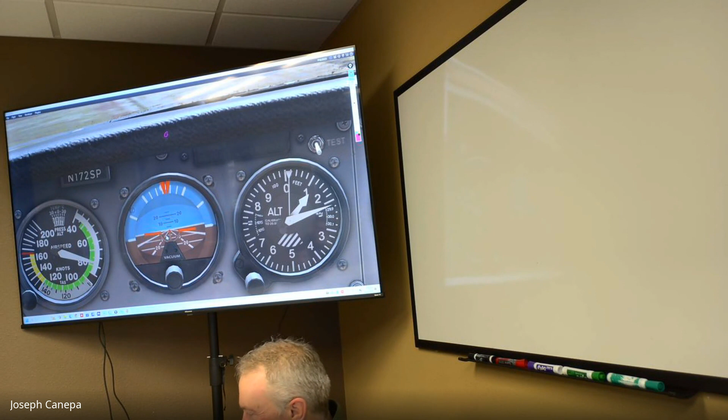Yes, it's actually pretty close to level right now, but you can see that little dot right there, it's actually just in the brown area. So that means if I look outside, we should be pointing down slightly. Let's zoom out here. Yeah, we're in a slight descent right there. You can see how you could just use the flight instruments to figure out what the aircraft is doing, how fast it's going, the altitude it's at. Here we can see we're in a slight descent right here in direction. So all of that stuff can be used.

Now, when you fly instruments, once you get your instrument rating, you'll be looking at these instruments all the time because you're going to have a hood on. They will not let you look outside when you're doing your instrument training.

Sometimes they put little curtains, or a colored film, over the windows and have you wear glasses so you can't see anything outside. It's just black.

But for instrument training, you need that because if you're flying in the clouds, you won't have reference to the outside world. It's amazing, you think it'll be easy, but after about half an hour your body starts telling you something different. It feels like you're in a turn, and that causes problems. Anyway, we'll talk about that.

So let's now discuss what these different instruments are made of. Let's go back here. All right, so this right here, we've seen it before. Let's go back to our image, and I'll show you this on the outside.

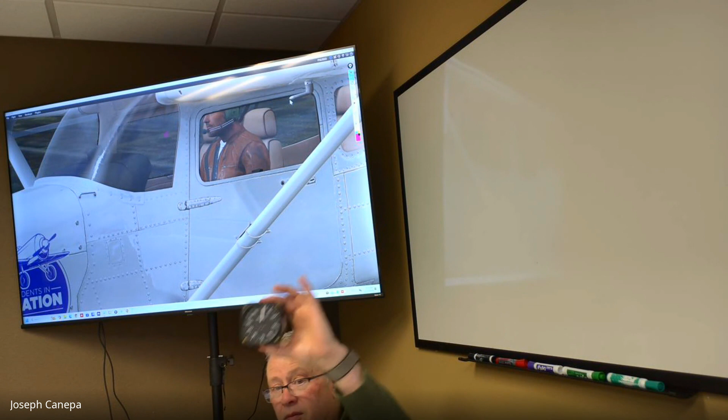Essentially all it's doing is measuring the amount of air hitting the aircraft, and by doing that you can determine your airspeed. This is a typical airspeed indicator - it's just got a needle that tells you how fast the aircraft is going. Again, it's not based on your ground speed, it's based on your airspeed.

Obviously if I were to blow into one of these holes, I could get that needle to move. The other thing you could do is take a tube and run really fast, or hold it outside your car window. That needle is going to start moving based on the speed you're traveling at.

So if a plane is just sitting on the ground with a strong 40-knot wind, that's the same as if you were flying at 1,000 feet traveling at 40 knots. It's the exact same thing. Again, it's not measuring ground speed, it measures the speed through the air - that impact pressure that's occurring there. Does that make sense?

So again, this is just a hollow tube that goes through there, and this is plumbed into the airspeed indicator. The airspeed indicator is the only instrument in the aircraft that uses the pitot tube. The vertical speed does not, and the altimeter does not use the pitot tube. There's a couple other elements in here.

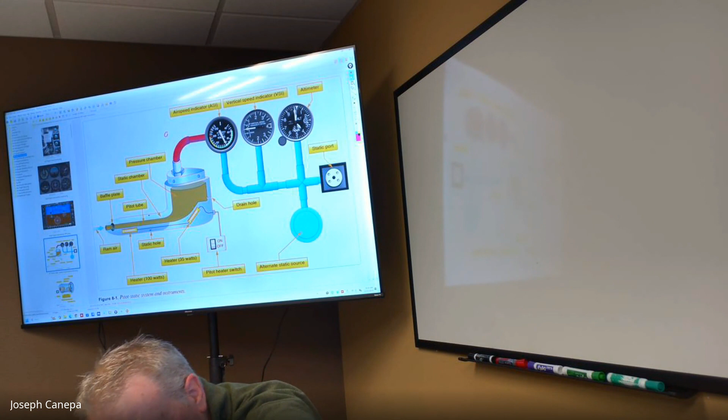Okay, so the next one is the vertical speed indicator. Well, actually, before we talk about vertical speed, let's talk about the altimeter, because that's a little easier. So an altimeter - okay, so this is an altimeter right here. Let me just...

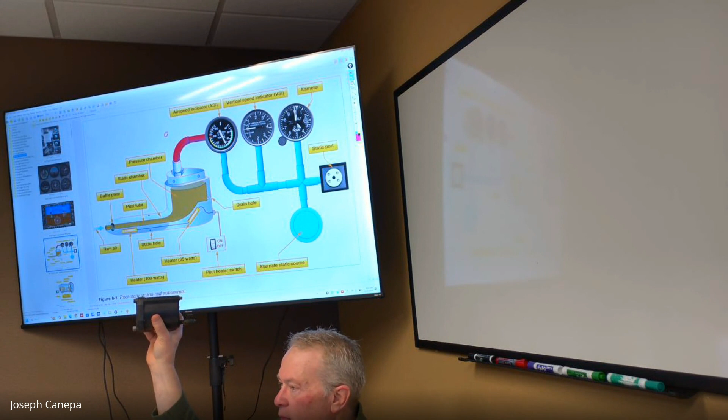So can anybody tell me what the altitude is that this is showing? 1,000 feet. Yep. And that's because the small dial there, the small needle is pointing at 1. The small needle represents thousands. The long needle shows 100 increments.

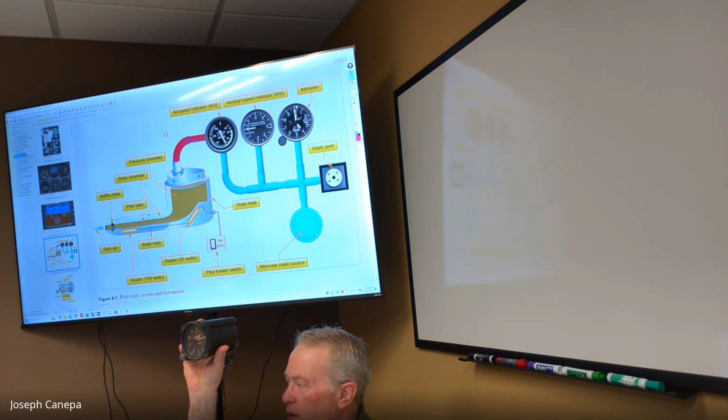So 1,200 feet would look something like this. Notice that the small needle is still showing close to 1,000, but that hundreds needle is showing 2. That's how we see that.

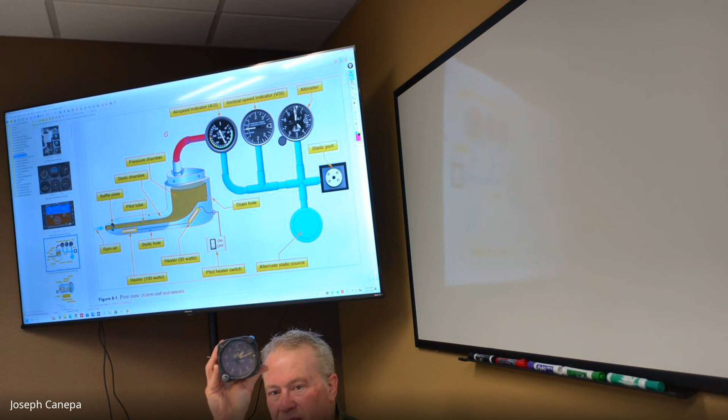And then you can't really see, there's a very small, thin needle pointing up close to 0. I don't know if you can see it at all. That's showing 10,000 feet increments, and that's barely reading on here. It's just still pointing at close to 0. So that's how we read the altimeter.

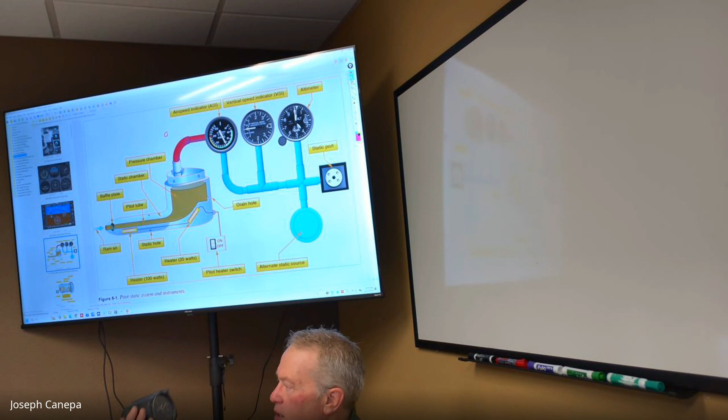Okay, you fill a balloon up. So if we take a balloon, fill it up on the ground, and raise it to 1,000 feet, is it going to contract or expand? It's going to expand. Exactly. That's what's happening here. These aneroid wafers are just a balloon, essentially.

We have to understand, first off, that as we climb up in the atmosphere—right now we're at ground level here, which is roughly about 920 feet at this building. If we were to climb up 1,000 feet, these wafers would expand, but the air up there has less pressure at 1,000 feet. And the same with 10,000 feet, there's a lot less pressure. So this is going to affect how this operates. That's how an altimeter works.

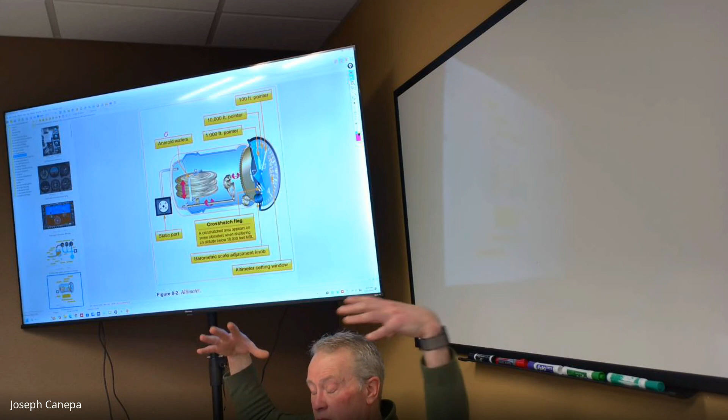I would probably break it on the vertical speed indicator, because it's a pretty cheap instrument. The altimeter is much more expensive. But if you crack that glass, all of that air around in the cockpit itself is static. It's ambient pressure, same as outside, maybe a little bit lower, but not much.

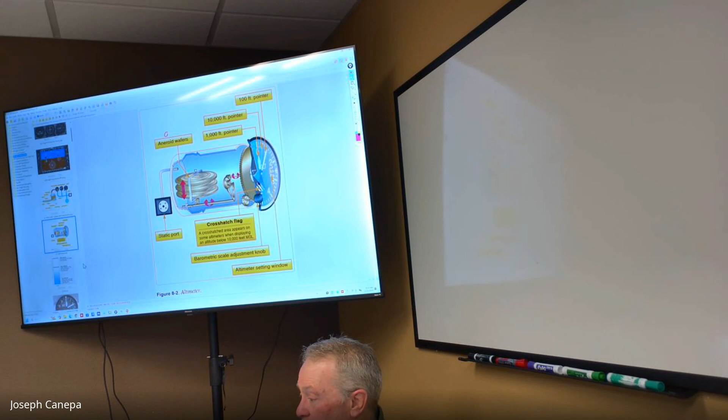It will still at least show you what your altitude is. So the vertical speed indicator, let's see if we can find one here. Okay, let's just go here. I think again a separate diagram. Let me just see if I can show that here. Down here, oh, here we go. Yeah, okay, so this is a diagram of a vertical speed indicator.

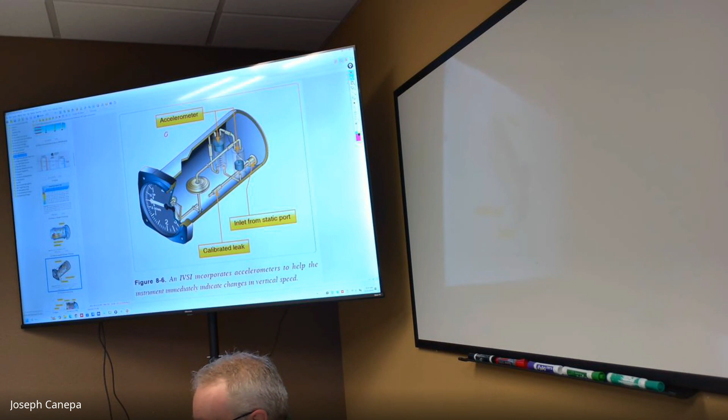It's very similar to the altimeter in the sense that it's got an aneroid wafer, but there is a difference. The big difference here is there is a calibrated leak, and they don't do a good job of showing it here. Maybe this is a little bit better.

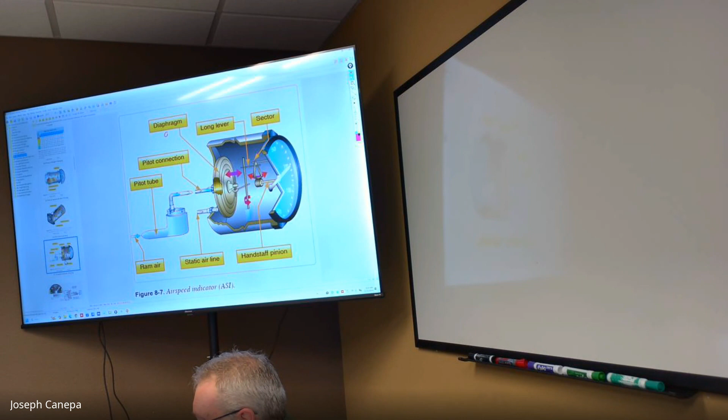The simplest way to explain that: you've got a balloon, and has anybody ever done this where you take a balloon, put a piece of tape on it, then push a pin through that tape? What happens is the balloon leaks very slowly, it doesn't just pop. Try it sometime: blow up a balloon, tape part of it, then push a pin through. The balloon won't pop, it will leak air. That's essentially what they've done here, they're leaking air out of the system.

So if I take, let's say we do this with the balloon, does that make sense what I'm explaining with the balloon? It doesn't pop if you just put tape on it. You've got a nice tight seal on it. It's a very, it's a pinhole leak.

But if we blow that balloon up on the ground and push a little pin through it, it's leaking air. As you climb, if that balloon was sealed it would just keep expanding, right? But this one's got a calibrated leak, so it's going to keep getting smaller and smaller, it's just going to leak. Eventually, if we stay at a certain altitude, the balloon is going to collapse all the way down to nothing because it's got that leak in it.

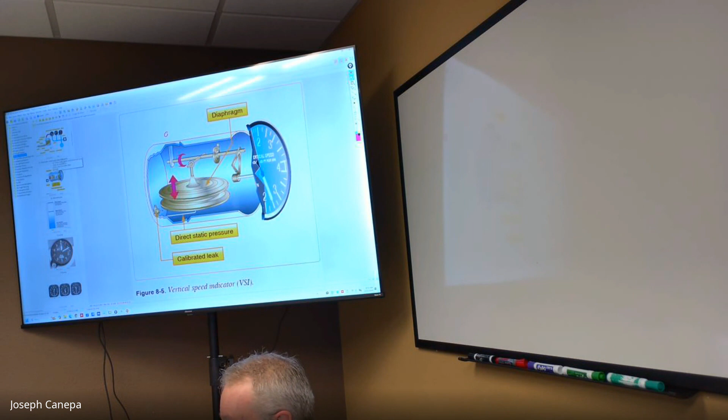But in any case, it is on the aircraft, we're just not seeing it here. I'm not sure why, but it would probably be somewhere in this area right here. They're very small—again, you're not gonna... it's very hard to notice. Let's go here. Let's see. We've got photos of it here. All right, um...

And directional gyro. So now let's—we've looked at the airspeed indicator, we know how that works. The altimeter, we know how that works. Vertical speed indicator, we know how that works. Now there's the other instruments that we have. We've got the artificial horizon, we've got a directional gyro, we've got the turn coordinator. You kind of explained what they do, but how do they work?

So to do that, what I'm going to do—these are all gyroscopic instruments. These three instruments have gyroscopes in them. So we've talked about this before with gyroscopes, how they work. I'm going to try to get this thing spinning so you can actually see how it works. Do you remember that we talked about gyroscopes a while back? We talked about rigidity in space. And because of the way gyroscopes work, they resist change.

They don't—when you try to move them, they resist. They want to stay in the same position or whatever. And we use that in aircraft, like here for the attitude indicator. That's got a spinning gyro. It actually would look very similar to this. So, I've got an attitude indicator here. Let's get this thing up to speed here.

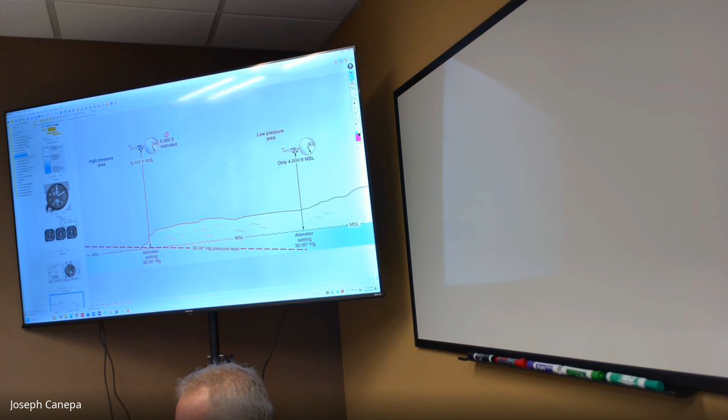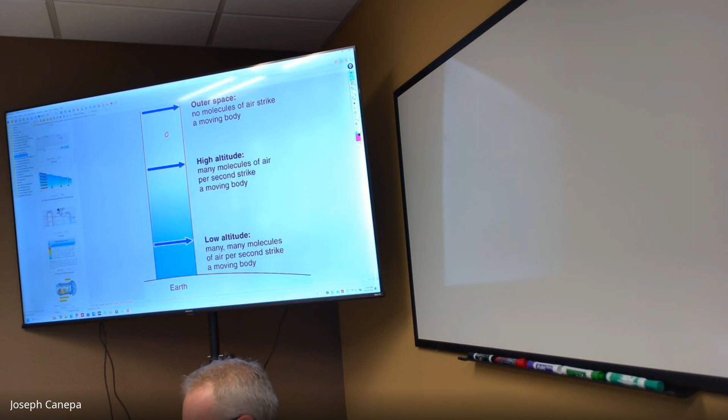Now, some of the things that can happen, as we've talked about before, are changes in pressure in the atmosphere. So here we've got an area - let's say this is Reedsburg right here - with relatively high pressure, and then lower pressure at Baraboo. Notice both of these planes right here, let's see that name. Yeah, they're both... we'll use this right here.

All right, so at Reedsburg, maybe you've got relatively high pressure - let's say like this. Let me put it in a better diagram.

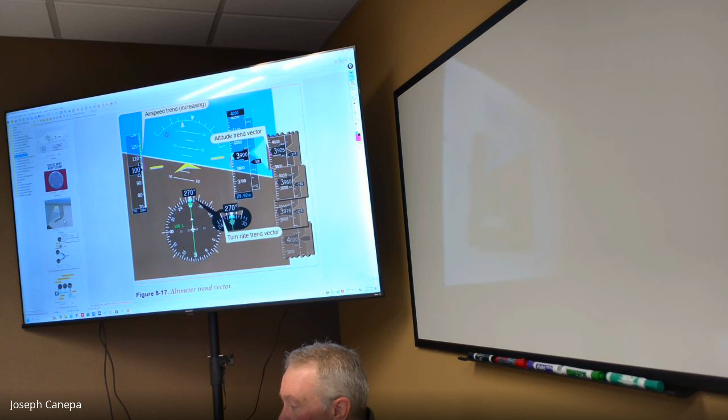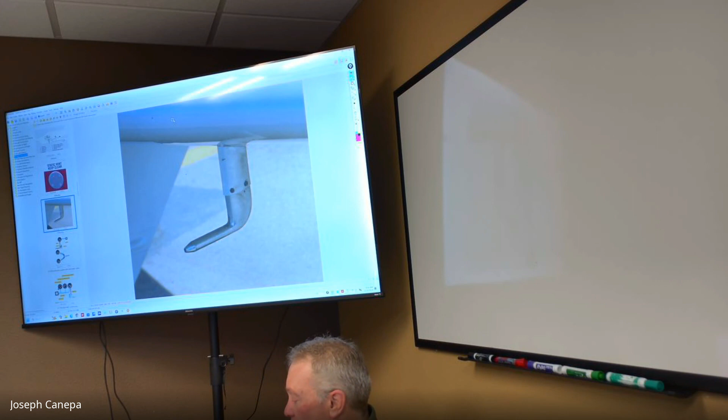Donnie asks why the pitot tube has to be like 3 to 6 inches away from the surface. It's a good question. What happens is - right here, this is the leading edge of the aircraft right there.

So this right here is the leading edge, and the air comes in from this direction and flows over the aircraft like this. But the problem is when air is flowing like this, it hits this and creates turbulence in this area where the pitot tube extends down right here. So what they're trying to do is get that out of the turbulent area.

So you get a more accurate reading of what the ram air is. In supersonic aircraft, it's even more critical. I don't know if you guys have seen pictures of some supersonic aircraft with their pitot tubes stuck way out on a pole or on the nose, and that's because there's a lot of turbulence around the aircraft.

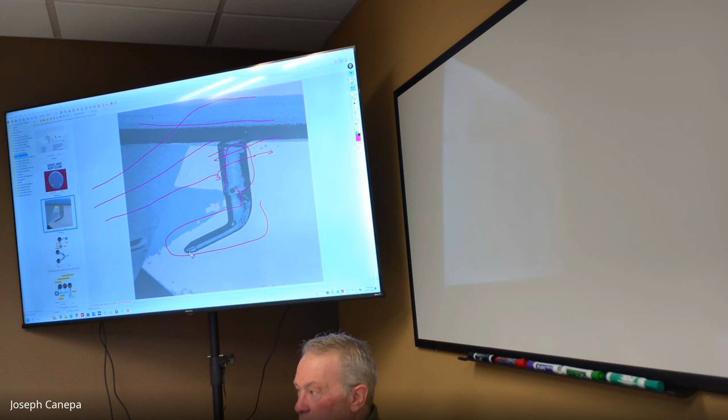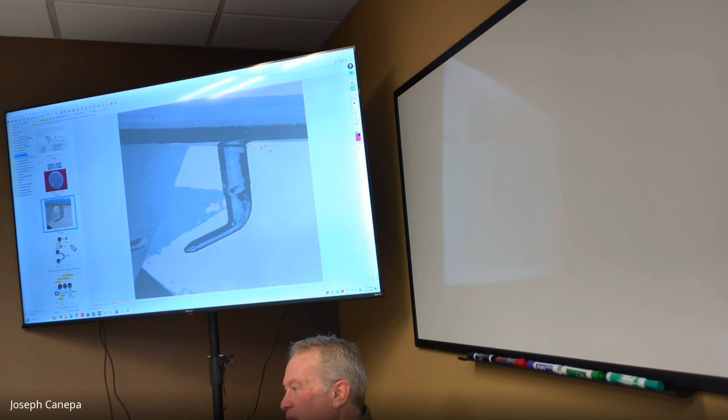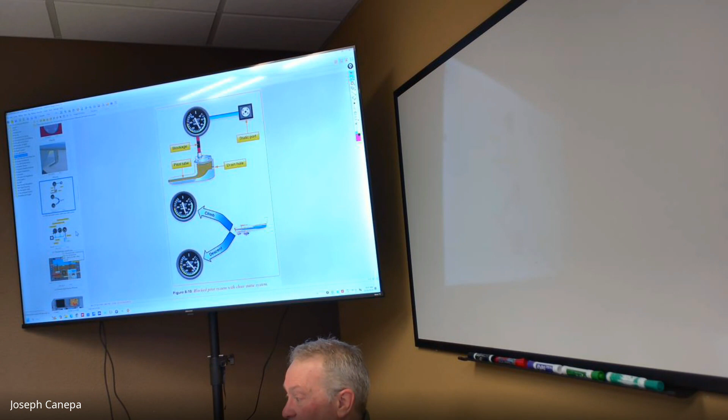So let's get back to here. Atmospheric pressure is going to affect how our altimeter reads. So if we have relatively high pressure, our altimeter is going to read different than if it was an inch lower.

Okay, so we were talking about this a little bit before. There's a little window in the aircraft or in the altimeter, called a Kollsman window, and that's the standard for adjusting the altimeter to whatever the current pressure reading is. You'll notice here as I turn this, those dials there kind of move.

That's adjusting it. So if I'm standing out on the ramp here with an altimeter, and I don't know if this is reading right, but I know what the altitude here is, what's the best way to set this? Radio call to get the barometric pressure.

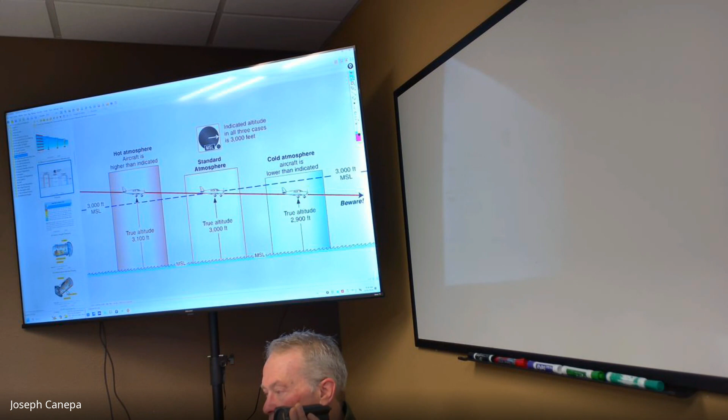That's why we need to get hold of ATC and ask them, or listen to AWOS or ATIS or something like that. That's when we use the Kollsman window here on this side. We adjust it, and it's hard to see - let me just see if I can bring it up here.

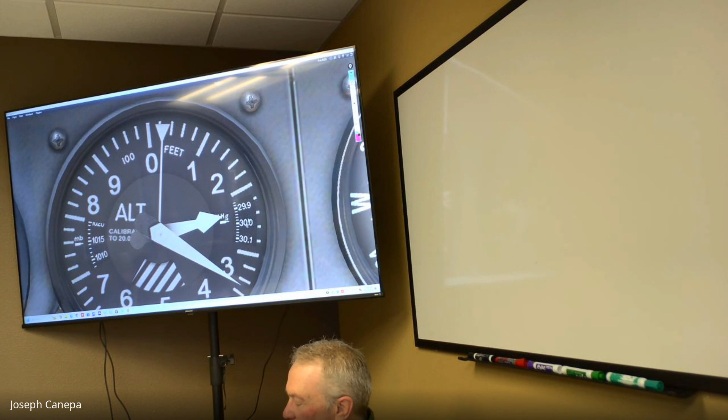Zoom in really close here. So it's 29.9 - can you read that? Zoom a little more. Here it's kind of hard to see, but that says inches of mercury there. So on this side we've got 29.9, 30 inches, 30.1 inches, and so on. You can actually adjust your altimeter with this knob right here.

So if I change that, see how it's adjusting that window there? That's what you're doing - you're adjusting it for whatever pressure you've got. That's based on the altimeter setting, the pressure setting outside. And that corrects your altimeter so that we know we are at that altitude.

Jason did mention that it's measuring the height above sea level, not above ground. It doesn't know how high the ground is below you or where it's at, but we use sea level as a standard reference throughout aviation in the world. We use that because it's pretty much standard - you're always going to have the same sea level. It's always going to be zero, roughly, so we use that as a standard reference.

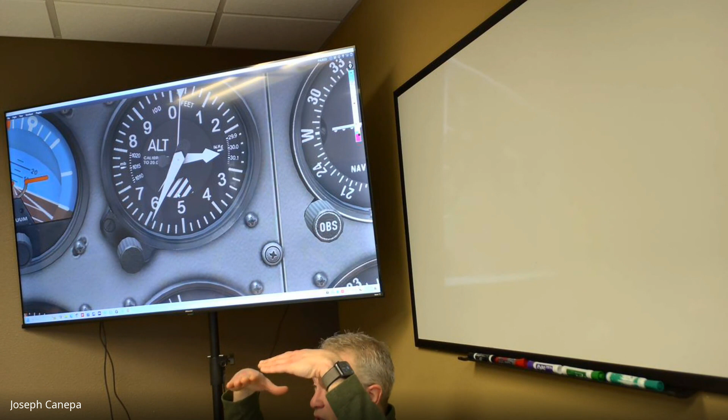Your altimeter is always going to show that. You may have terrain that rises up 2,000, 10,000 feet, and your altimeter may say you're at 12,000 feet, but your height above ground is only 2,000 feet. If you're flying over the mountains, and your altimeter says 12,000 feet, your mountain right here, even though you're at 12,000 feet on your altimeter, you're only 2,000 feet above ground.

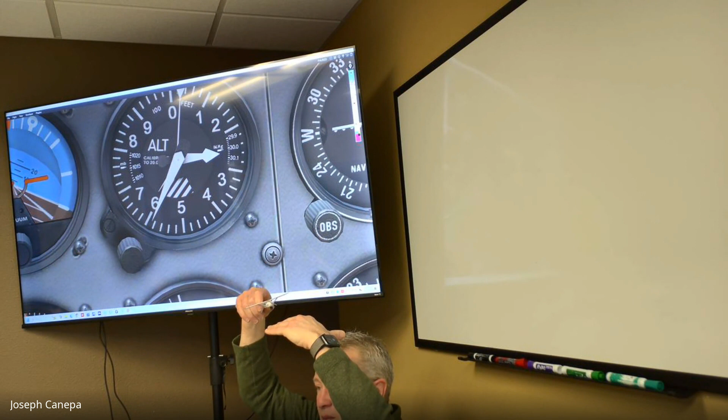So again, that stuff is really important because if you run into bad weather, you can't see outside, there's towers outside, geographic features you can run into and things like that. So you obviously want to know what your altitude is there.

Okay, so a couple things too they'll point out. When you go from high pressure to low pressure, they've got a term that will help you remember this. And if you think about how the atmosphere works, you should be able to work some of these problems out. You will see these on the exam to talk about what pressure affects, how it affects the aircraft itself.

There's a saying, going from high pressure to low pressure, look out below, or going from high to low, look out below. That's a common term that we think about. So what they mean there is if you're going from an area of relatively high pressure, let's say you're on a long cross country, you're going from Madison to Duluth or something like that. And the pressure in Madison is 30.1 and the pressure in Duluth is 29.1. That's a 1 inch difference. That's about a 1,000-foot difference. So for every inch of mercury, you're talking about 1,000 feet.

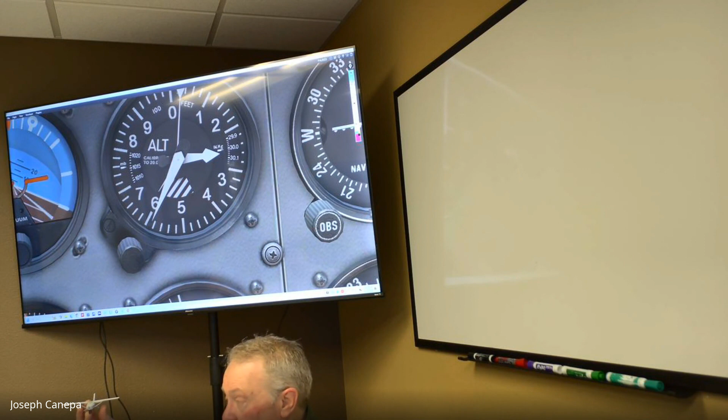So from high pressure in Madison, we're at 30.1. Now we're flying into an area of low pressure up in Duluth. They're showing a pressure reading of 29.1, let's say. So because you're going into lower pressure, the altimeter is going to actually indicate higher than you actually are. High to low, look out below.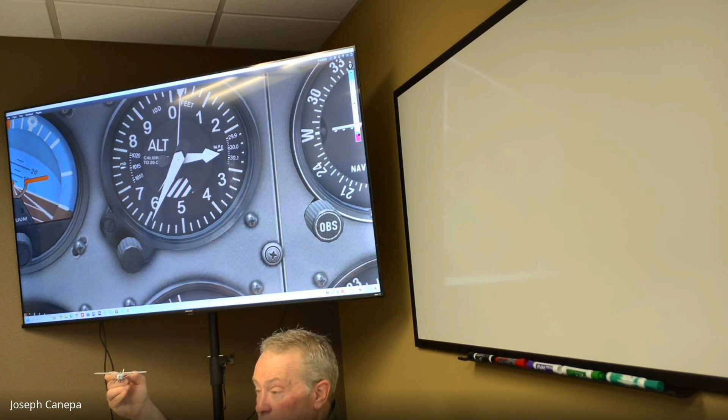So as you climb, you go from Madison, say Madison's right here, and Duluth is over here. And even though your altimeter is always reading, let's say you're at 3,000 feet, that's your actual aircraft. If you stay at 3,000 feet, you're looking at your altimeter, 3,000 feet, but it's actually going to be descending down quite a bit. When you get down to Duluth, you'll only be 3,000 feet above ground. You'll only be like 2,000 feet above the ground if you're at 3,000 feet above the ground in Madison. So that's again one of those things that affects how we use the altimeter.

So you're constantly setting your altimeter, setting that Kollsman window. We're constantly adjusting this during our flight, and we should, especially when there's frontal changes. There's a strong high pressure or stronger low pressure systems moving in, because they can move really fast and they can change the pressures quite a bit. So again, it's important to understand how the altimeter works.

High to low, look out below. That's very simple to remember and commit it to memory. Also, from hot to cold, look out below.

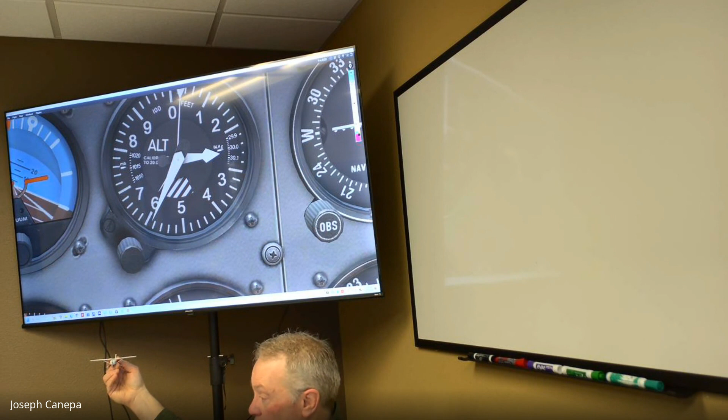So hot air, if you're flying from relatively hot air into relatively cold air, again, let's say we're going from Madison to Duluth. If you have your altimeter set at 3,000 feet at Madison, and you're flying to Duluth, temperature at Madison is 90 degrees, and in Duluth it's like 60 degrees. There's a big temperature difference. Well, if you don't change or adjust your altimeter, the aircraft is going to again show a lower altitude. You'll be flying at a lower altitude. The altimeter is still going to say that you're at 3,000 feet. So those are the types of things again that we have to be aware of with it.

So they talk about, they've got some diagrams in there. I think this here, yeah, this one is a good one for showing the effects of non-standard temperature on an altimeter, what it does to the aircraft itself.

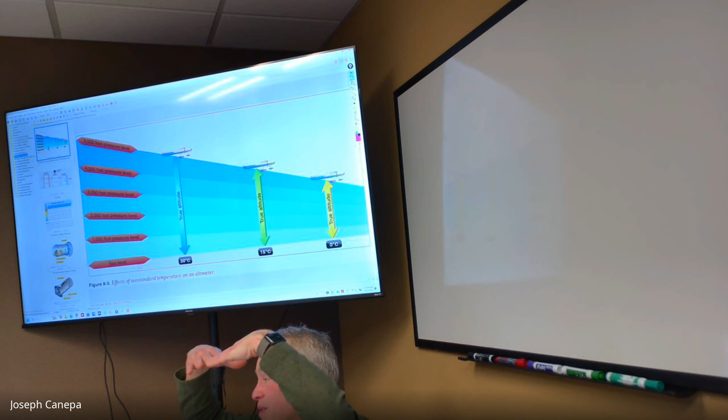All right, well, some of you guys are going to keep going—let's just keep moving here. So on page 8.6, they talk a little bit about the types of altitude.

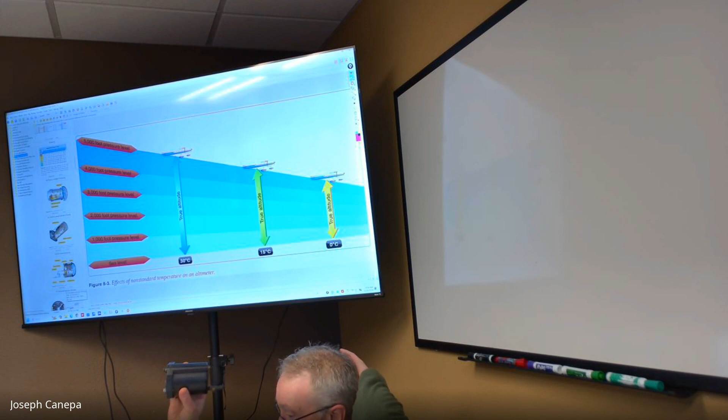Airspeed is the same situation—this airspeed indicator is presently indicating zero. The reason we have indicated, as opposed to calibrated and some of the other types of speeds they talk about, is because there are certain errors built into the instruments, and even though it says 100 knots, you may not actually be traveling at 100 knots. That's true with an airspeed indicator, and the same with the altimeter.

So again, let's talk about types of altitude. Indicated altitude is read directly from an altimeter. True altitude is the vertical distance of the aircraft above sea level—so this is your actual altitude above sea level, or MSL altitude. Absolute altitude is always the distance above terrain. Sea level is about another 920 feet below us at this point where I'm standing. If I were to drill down to the ground 920 feet, you'd be at sea level.

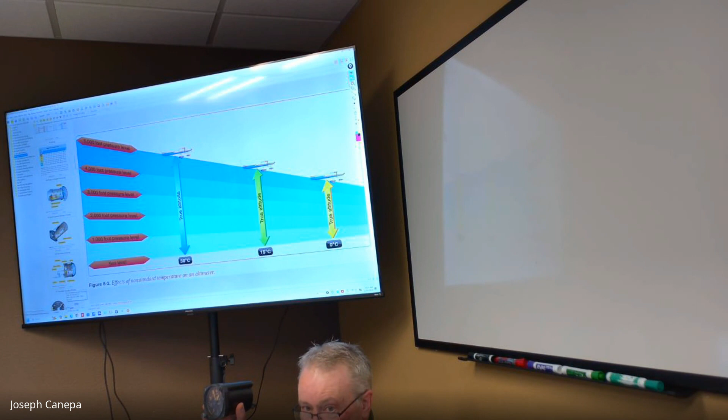With absolute altitude, we're showing how high we are above the terrain. So right now, if I read my altimeter and it's set correctly, let's say I climb up to 3,000 feet, and the field elevation here was 1,000 feet—we'd still show indicated 3,000 feet, but I'd only be 2,000 feet above the ground. That's the difference: absolute altitude would be 2,000 feet, indicated altitude would be 3,000 feet, and true altitude would be 3,000 feet because everything's set up correctly.

And pressure altitude—that's essentially indicated altitude when you just turn your Kollsman window to a standard pressure setting of 29.92. We use that for doing calculations of performance and stuff like that; a lot of performance calculations require the current pressure altitude.

And then there's density altitude—that's pressure altitude corrected for variations from standard temperature. We'll get into this a little more in the weather section when we talk about long distance navigation and the effects of these on aircraft performance, so I won't go into a lot of detail here.

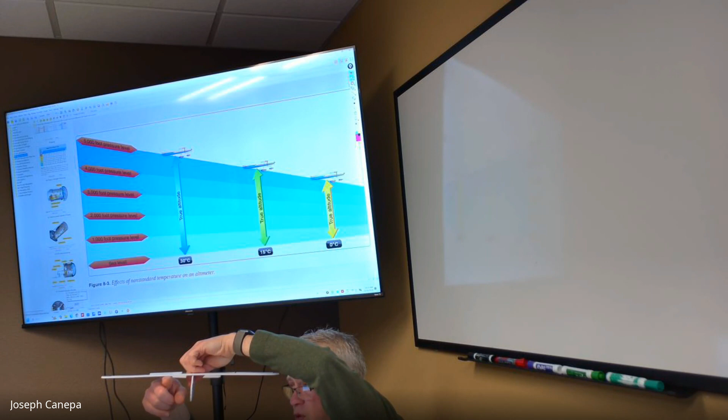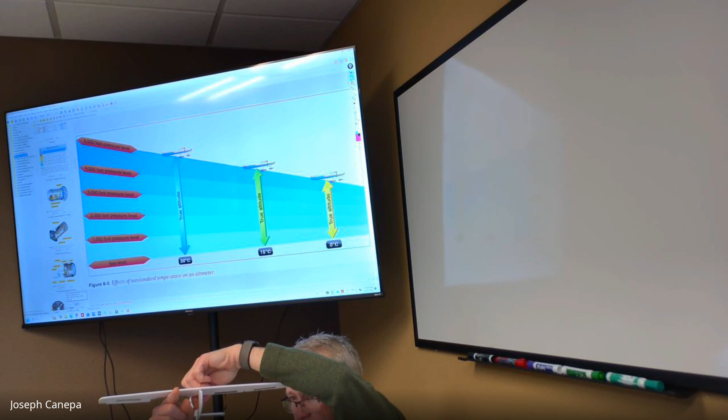It would make sense that it's most accurate when the plane is down low to the ground, flying straight and level. But if the aircraft is at a high angle of attack and flying like this, that ram air is not all hitting that pitot tube directly. If I fly like this, the pitot tube's pointing up, and here it's pointing straight ahead. So if I'm flying like this, the pitot tube is picking up that ram air. Again, if I go into a high angle of attack, it's not getting that direct ram air. So that's the difference between the indicated and calibrated airspeed.

So again, with certain changes there. And then true airspeed is corrected airspeed - calibrated airspeed corrected for altitude and non-standard temperature.

The ground speed is literally that - it's the speed of our shadow across the ground, which may be different in some cases.

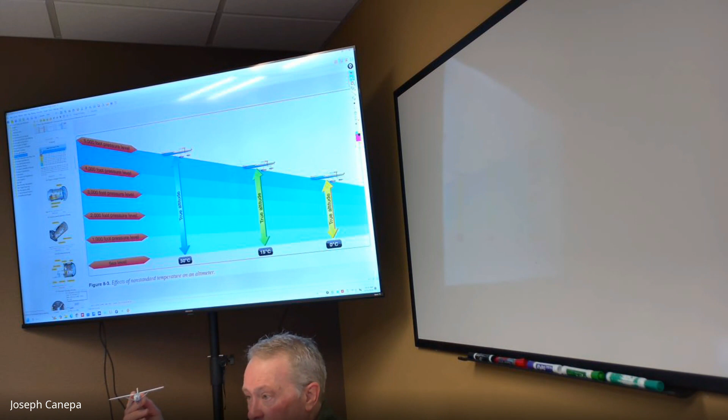And I hear guys, it happened to me several times. Basically, you take a plane up on a really strong wind day. You can literally take it off, and if you point the aircraft into the wind, you may actually be flying backwards at a high enough altitude. If you get high enough and you have strong enough winds, the plane will fly just fine because it's moving through the air around it relatively fast, maybe like 100 knots or 60 knots or something like that. But because the wind is so strong, it's actually moving it backward. It's a really weird feeling, but that's the distinction between ground speed and your airspeed.

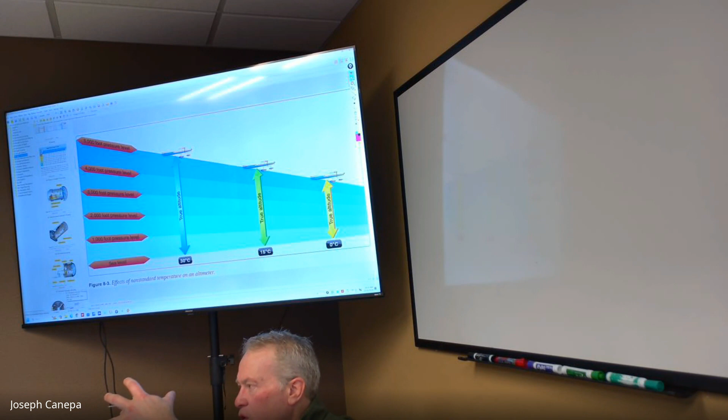Again, airspeed is how fast you're moving through a parcel of air, even though that air might be moving around you, affecting the aircraft.

And it's important to understand the differences between ground speed and airspeed.

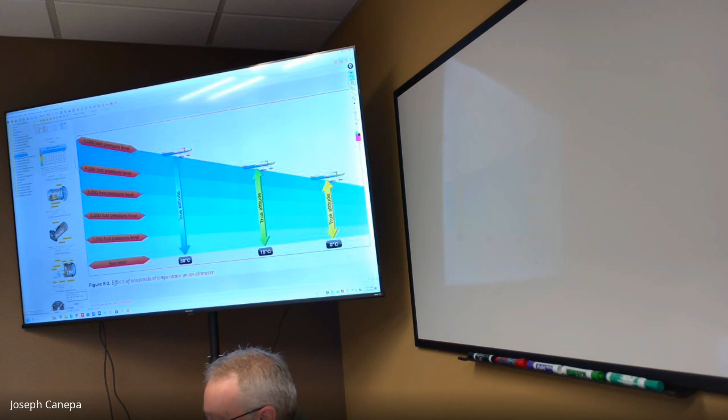So I think we've gone over this. I'll just show it to you again here just to be on the safe side.

All right, so airspeed markings - there are several that are on here. We talked about this in the past. VS0, that's the stall speed with flaps out, gear down, everything hanging out. VS1 is the - V, by the way, stands for velocity or speed. So these are all V speeds indicated on the airspeed indicator.

And every aircraft is going to have something very similar to this, depending on the performance. But they'll always have a white arc, green arc. Sometimes they'll have a yellow arc and a red arc there. So these markings always indicate the same things.

Again, the white arc indicates the safe flap extension speed. The bottom of the white arc is going to be the stall speed there. The green arc is the aircraft in a clean configuration, and the stall speed right there, VS1, you can see it's listed right there.

White arc, again, it's there. The top of the white arc indicates the maximum speed that you can have the flaps out. Beyond this, if you fly the plane with the flaps down, there's a possibility you could overstress the flaps and break some linkages or something like that. It would be unlikely, but it is possible. At some point, if you're flying long enough, you'll actually start warping the backs of where the flaps are attached. That's almost a guarantee, and you can see it if you look on the aircraft where somebody's flown flaps out - you'll see stress marks on the skin there.

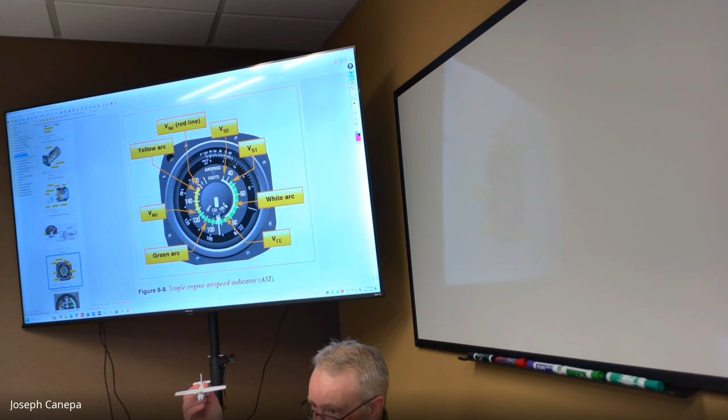Okay, so those are all collectively called V speeds, by the way. There are some speeds that are not listed on the airspeed indicator. The maneuvering speed, landing gear operating speed, they've got them listed on page 8-10. Best rate of climb speed, single engine best rate of climb speed, that actually is on there. But a lot of times you won't see those other V speeds. This is on page 8-10 again, they talk about the other types of V speeds there.

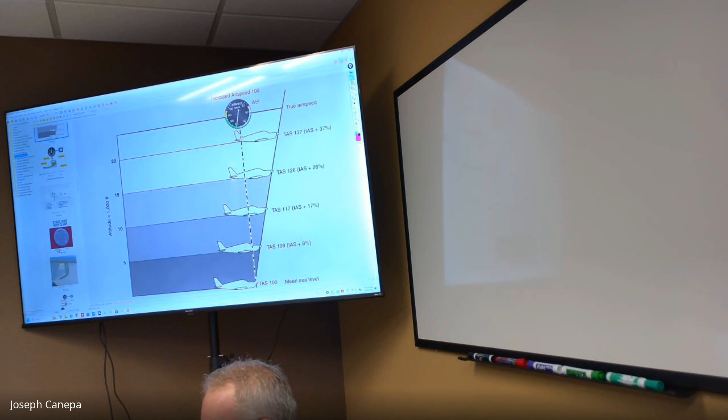What can happen if the pitot tube is blocked? So in the case of this, if you've got a blockage in your pitot tube, can anybody guess what's going to happen to the airspeed indicator? Yeah, it's going to show zero. Yeah, because there's no pressure, nothing blowing through this tube to hit this and cause that needle to move.

Yeah, so what happens is you've got this airspeed indicator, as all airspeed indicators have, you're going to have two ports. One is going to be the ram port from the pitot tube itself, this one right here, and the other is going to be for your static port. So the ram port goes in and fills, I'm not sure if it's like some sort of weather vane or something like that, but it actually impacts something and causes that needle to move. The static port is just filling the outside, or the air surrounding that, with the air that's outside, the static air pressure that's outside, the ambient air pressure. And that's so this reads accurately at any altitude. If this was completely sealed off, this instrument would not really read correctly. It'd have to have the outside static pressure in the instrument itself.

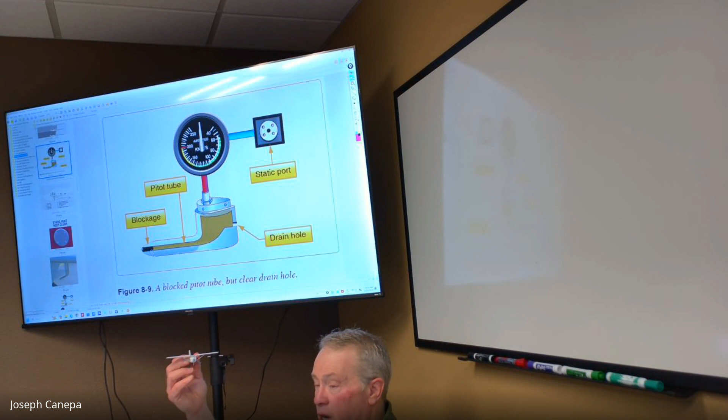If you're at a high altitude and you block your static ports, the static pressure inside the cavity of the airspeed indicator is going to be the same pressure that the static port was blocked at that time. So if the static port was blocked at 3,000 feet, and I go into a descent, the airspeed indicator is going to act as though I'm at 3,000 feet, essentially. That's the way to think about it.

So when you see a question on the FAA test, if the static port gets blocked, how is it going to affect the airspeed indicator? When it gets blocked, it's going to remember what your altitude is at that point.

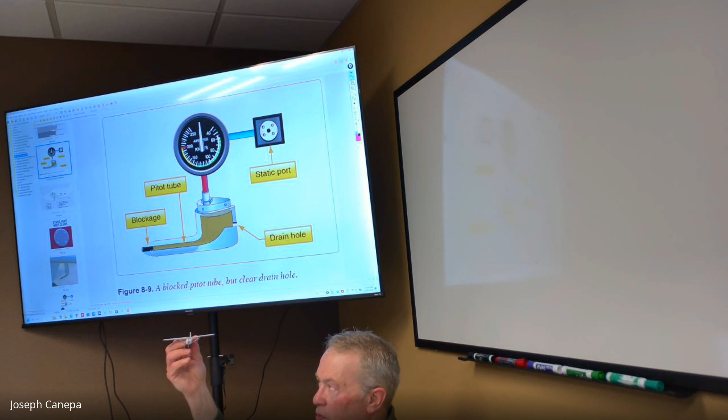So what blocks them, like a static port? I'll give you anything on the ground. When you do your pre-flight inspection, you're going to walk around the aircraft and look for things like dauber wasps, which love to go into pitot-static tubes. You can get ice in there. Bugs can smash into the pitot system, not so much the static. Somebody can wax your aircraft or paint it and cover up the static port. They're tiny, smaller than almost like a pinhole, so it doesn't take much to block it up.

Yeah, usually when they're washing it, they'll put a piece of tape over the static port so no water gets in it. Those pieces of tape, I've actually had one on before. I caught it thankfully, but it was really hard to see that piece of tape. Somebody actually left it on there? Yeah, after they were done cleaning. It was really hard to see. Yeah, that's the kind of thing that can go on in real life.

So that's your job as pilot in command. You have to walk around the aircraft and inspect all these things. You have to know what to look for. Jace caught this when he was doing his pre-flight inspection. When he walked around the aircraft, he saw that piece of tape. Could have been a bug or something like that, but you have to check. That's your responsibility when you walk around the aircraft. When your instructor takes you up flying, they're going to expect you to do the pre-flight, and they're entrusting you with their lives that you're going to inspect things like that.

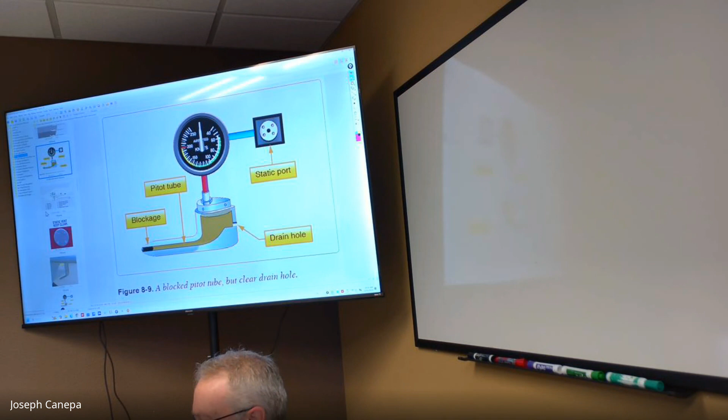So those were all of our flight instruments, you can see that on the page here. Most of the more advanced planes now have two displays - they'll have one for navigation and another one for engines, with instruments and things like that. I'll show you that here in a second.

So there are different types of systems. What I've been showing you so far is a typical representation of like a Garmin G1000 output - you can see how it's got the same kinds of buttons. They're all very similar, but there are other manufacturers out there, not just Garmin, and sometimes they have different interfaces to their systems. But they all have several things in common - you'll always see an airspeed tape on the left-hand side and altimeter on the right-hand side.

They all have different representations of vertical speed. So here, like in this one, they've got almost a dial. I don't know if you can see that, let me zoom in here - this is the representation for a minus 500 foot descent, the dial there, and that's on 814.

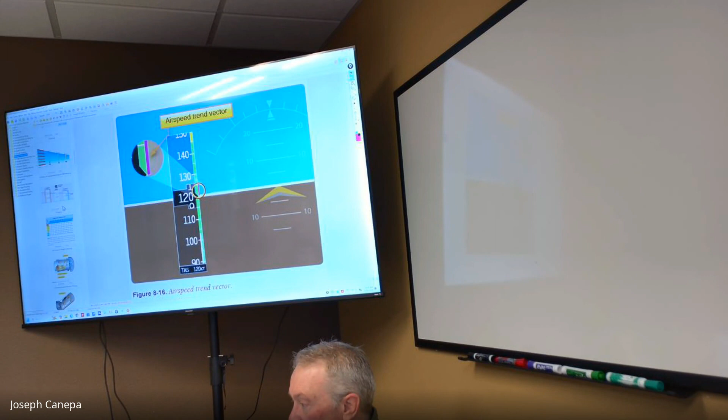Here you have to interpret each one of these instruments. It's a lot easier because you just quick glance at each one and see what's going on, but it's not the same. This artificial horizon is much smaller, basically the size of one of these instruments, whereas the large PFD display here is huge. It helps with situational awareness.

Trend vector, so that's gyroscopic instruments. We talked a little bit about how gyroscopes work. What we didn't talk much about was precession.

That's something that exists in all gyroscopes. This is on page 8-15. Precession is the tilting or turning of the gyro in response to a deflective force. What they mean is if this thing is spinning super fast and there's a force exerted on it...

Because there's always some friction someplace in the bearings, up here, down here, whatever, there's going to be other forces that act on the gyroscope, and it's not going to behave the way we always expect it to. Because of that, you have this precession, or tilting of the gyro, in response to those forces.

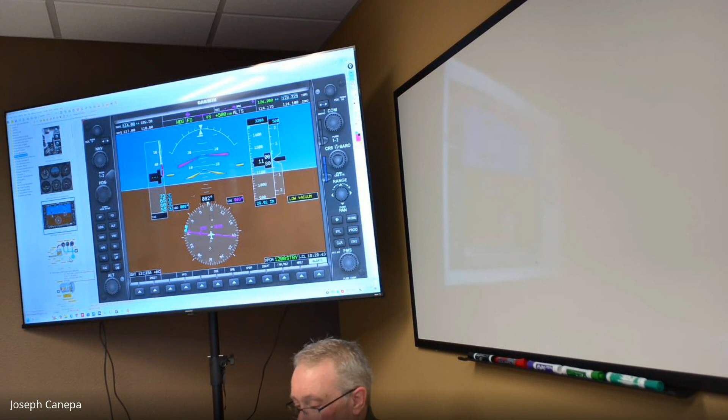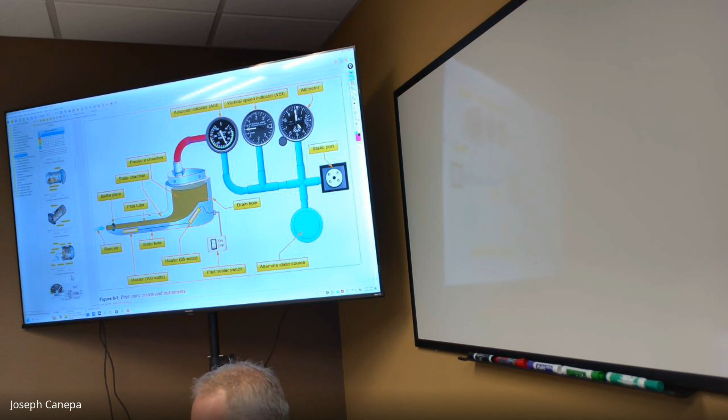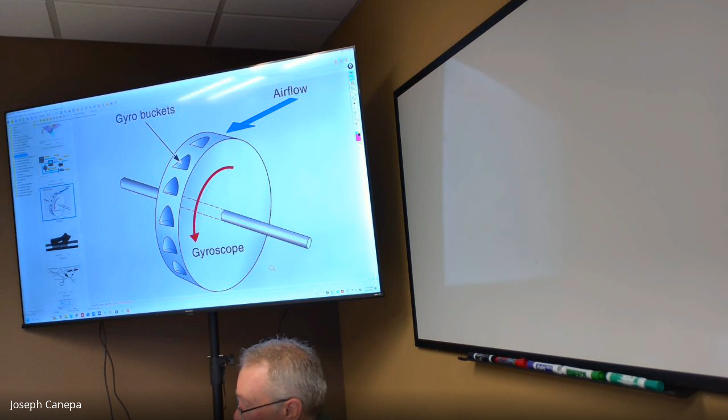And you can see on this, let's see, what is this? 820. There we go. Here's a gyroscope with vanes in the gyro buckets, they call them. Airflow hits the buckets, and it causes that gyroscope to spin. There would obviously be a vacuum source over here. It sucks in air on this side and draws it around to keep it spinning.

So this is a typical layout for a vacuum system. You've got air going to each of these instruments, and it's getting drawn to this vacuum pump right here and then blown overboard. The reason they do that is because you could say, why don't we just blow air into all these systems, why do we have to suck it out? The problem is these vacuum pumps can fail, and when they do, parts and stuff will go through the system and get caught in these instruments and basically destroy them.

So what they do is have a filter, which is very simple. It leads to outside air, and it sucks in the air. The air goes through this, so it's free of impurities. Then it gets drawn through the instruments and across those vanes, driving those instruments, whatever it may be.

Then also a couple extra gauges. You're going to see a suction gauge on the aircraft. It's just to tell you how good your vacuum is. Usually between 4.6 and 5 point something is a decent vacuum for most aircraft. It weakens as you get higher. If you go to a real high altitude, the vacuum system may not be strong enough to provide enough power to keep those gyroscopes spinning, but you'd have to be at a pretty high altitude there.

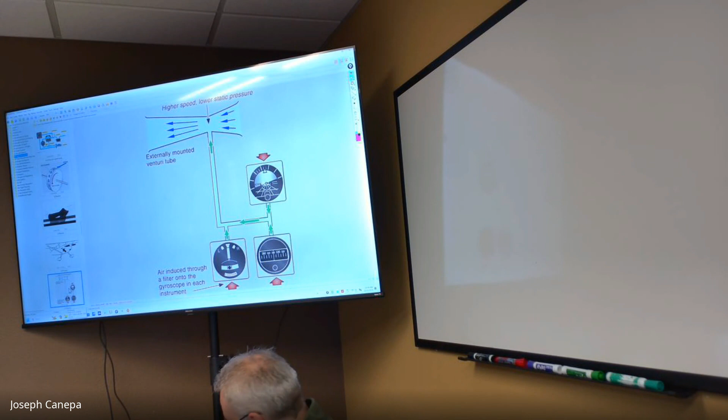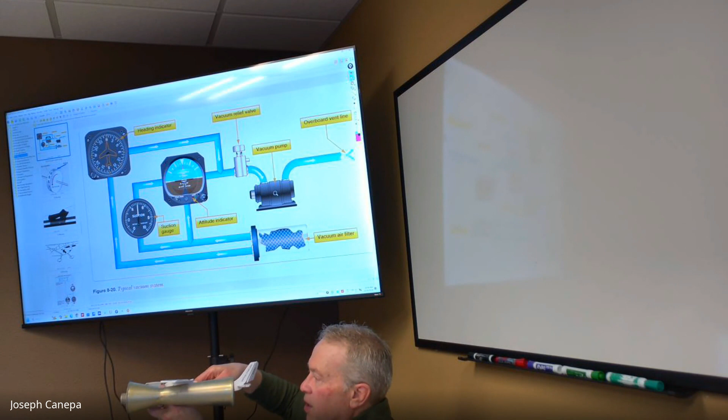Remember I showed you that venturi? You guys remember this? That's what this is for, it's to create a vacuum. So instead of actually having a vacuum pump like here, this just mounts on the side of the plane. If the plane was moving forward like this, it'd be mounted on the side like this, on the front, and it just creates enough of a vacuum that you don't need a vacuum pump.

The drawback to these type of systems, and you see them a lot on older aircraft, 40s, 50s vintage aircraft, is they don't work when the plane is just sitting on the ground. The plane has to be moving through the air. So you're not going to fly a plane in IFR conditions that only has this, it has to have a vacuum pump.

Yeah, we've gone through that. I'm not going to dive into that here.

Let's see here. One last thing I think we have to talk about is the compass thing.

So they talk about this flux gate compass. It's not something you'll see on the test initially. They are used in some of the newer avionics, but essentially a flux gate compass is just another way of determining your heading without some of the problems we have with a magnetic compass. So magnetic compass, this stuff is important.

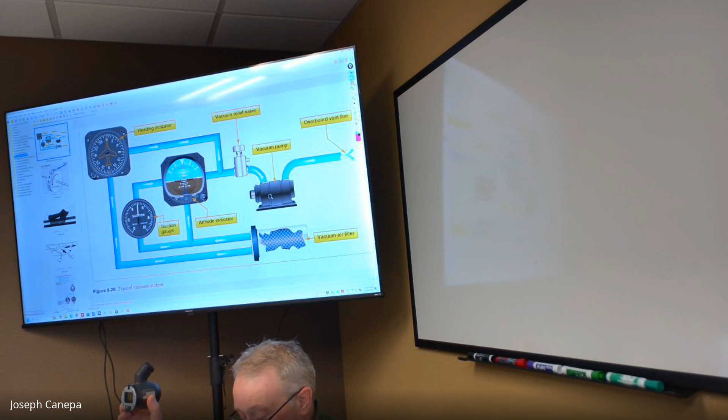They also have other types of errors that you may not know of. There's acceleration errors and magnetic dip errors and things like that. So let's see what they've got here.

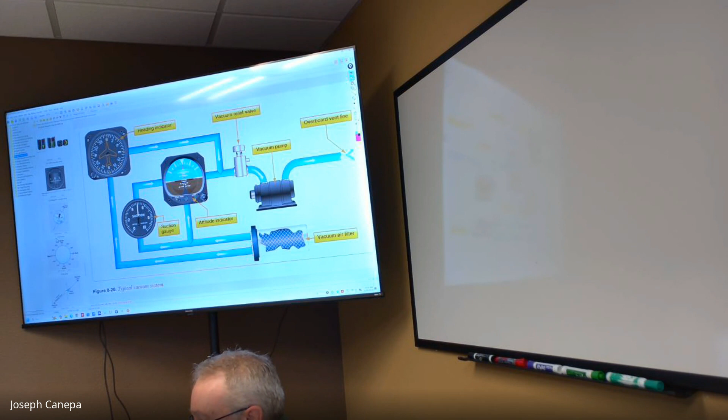So one day you might stand outside your house and point to a specific point. Let's say I'm looking at another house, and it's in the direction of 360 degrees or something like that. The next day, or maybe a month or two later, you do the same thing with your compass, and it's going to say it's now at 359 degrees or something like that. So that would take over time, but it could affect the compass reading over time.

Yeah, you had a question. Trey, if I remember correctly, the current magnetic North Pole is somewhere like in Greenland, it's not in the North, it's south. It's well south of the North Pole, and I'm not sure.

I think they've got a diagram of where it's at. So it's constantly... it is, it doesn't... Well, the Earth is never moving just like this. It's kind of like not a perfect circle.

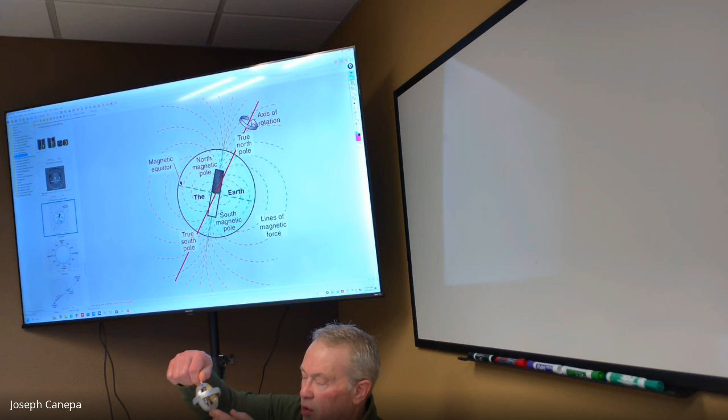Yes, and it tilts. So if you look here, here's the tilt of the true north or the poles. These are the poles that the Earth rotates around, the true North Pole and true South Pole. So as the Earth rotates, it's rotating like this. There's our true North Pole and our true South Pole.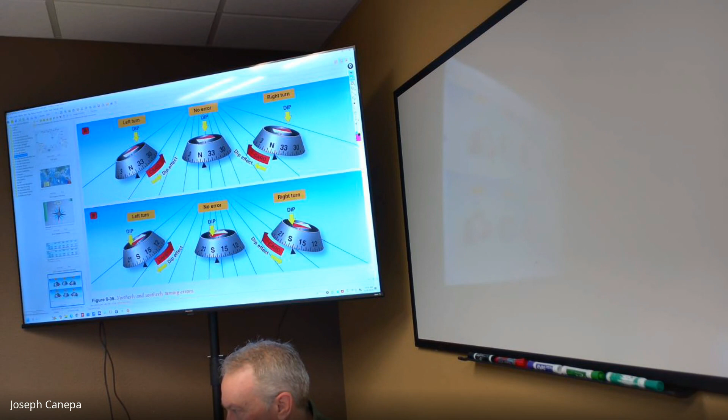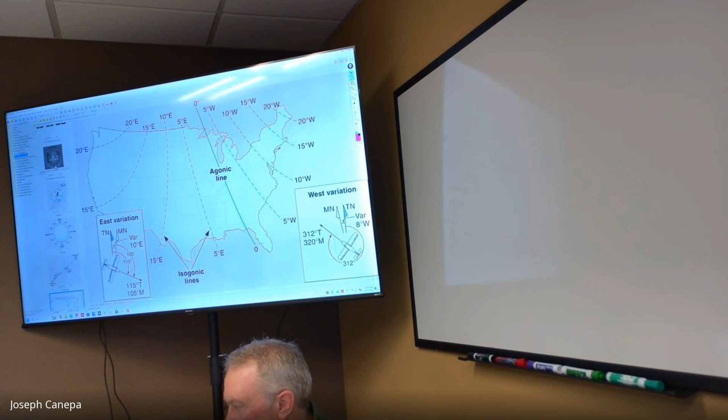The magnetic poles, however, are different. They're going to show up here. And then we get it back. They show it here, but I thought it was someplace in Canada, northern Canada, where the magnetic North Pole is. Yeah, what was it, I remember correctly, it's like the top.

And because of that, you have these variances in the magnetic poles, and it's dramatic. Your true north in, say, Washington State, for instance, could be off by as much as 20 degrees from magnetic north. So those are some of the things that we have to deal with there.